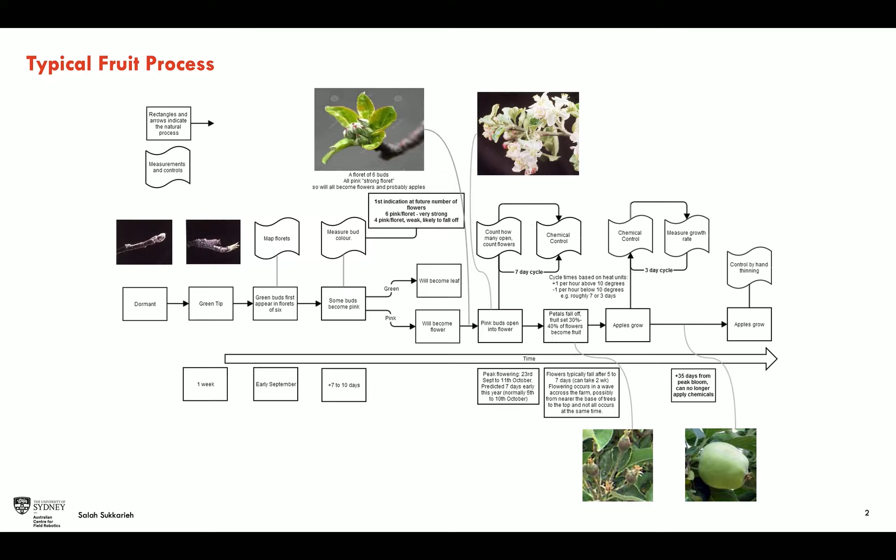When you look at Jasper Brown's video on YouTube, you'll see the end goal, but in this activity I wanted to lead through the process. That was important because to get to that point of harvesting, we needed to go through the steps with the growers and look at different aspects of their farm production cycle to understand where the perception system as well as the control system would work.

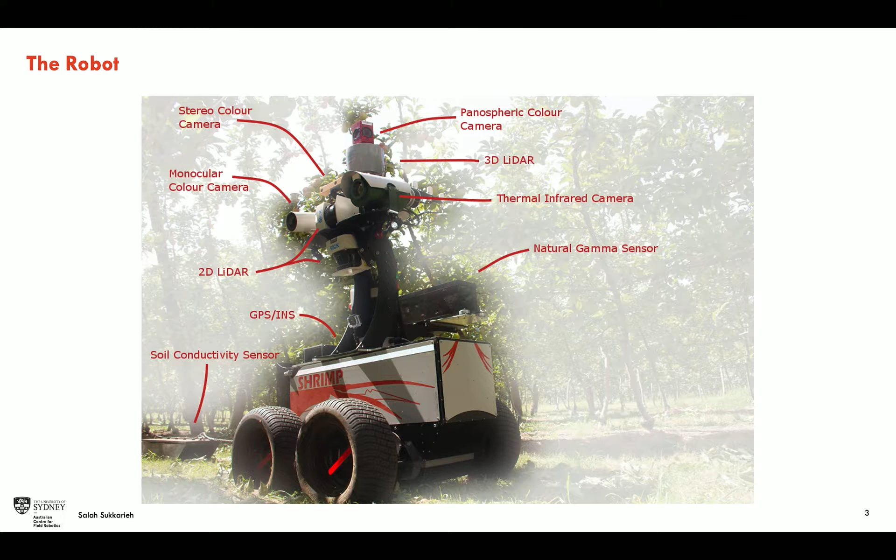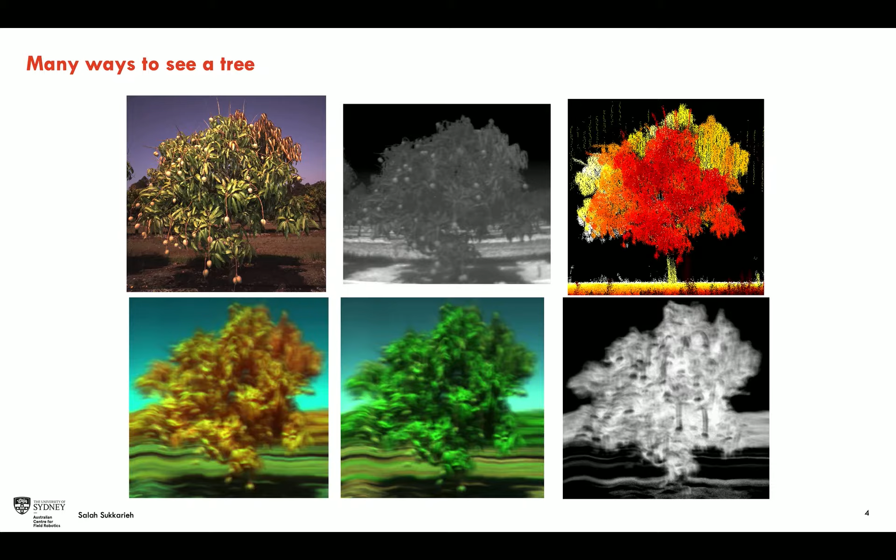Originally we had this robot - just a Shrimp unit where we put a whole bunch of different sensors on board. We started to look at different aspects of what you saw in a tree and the different types of sensing information that was relevant - was it hyperspectral, laser, LiDAR, vision, thermal, or a mixture in between. Those were the key elements we wanted to focus on.

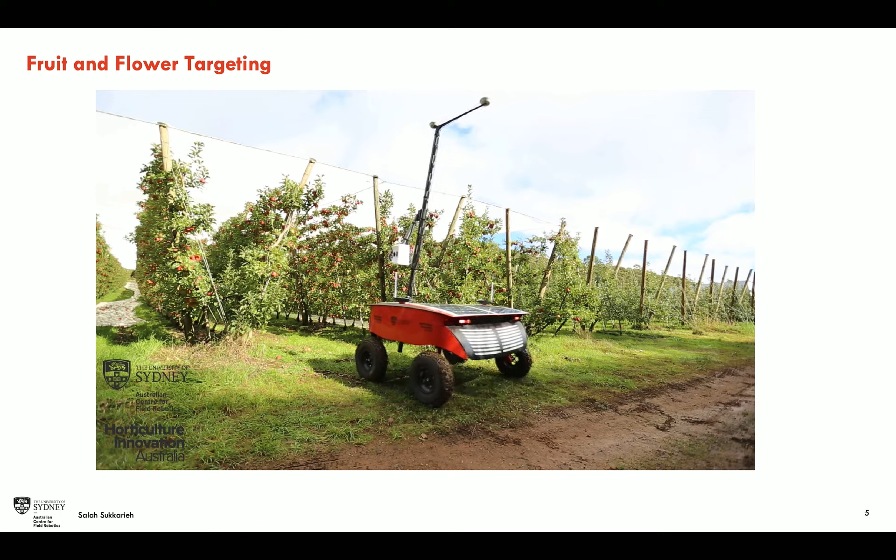This is a video showing the output of one of those activities, which was: in real time, could you detect fruit and target fruit, and at what frequency could you do that. This is detecting apples in real time, and you can see a little water squirter firing at each individual apple as it comes through.

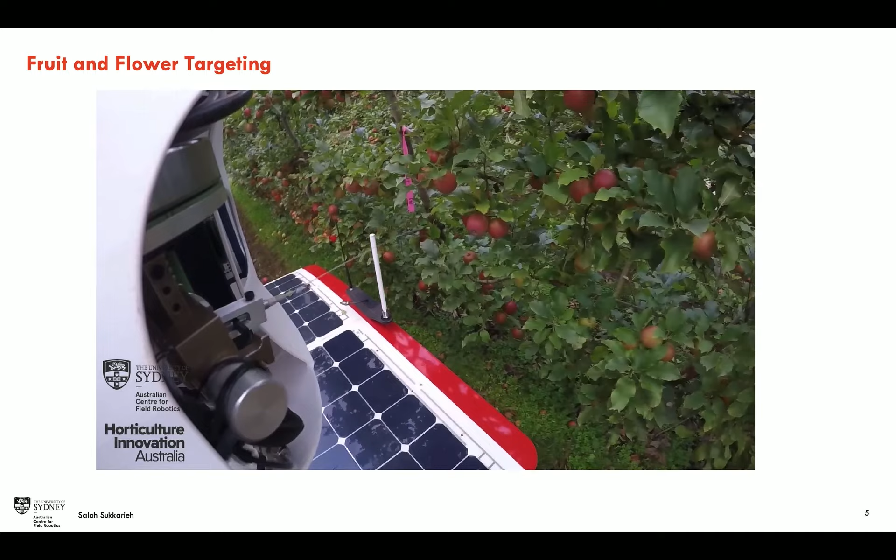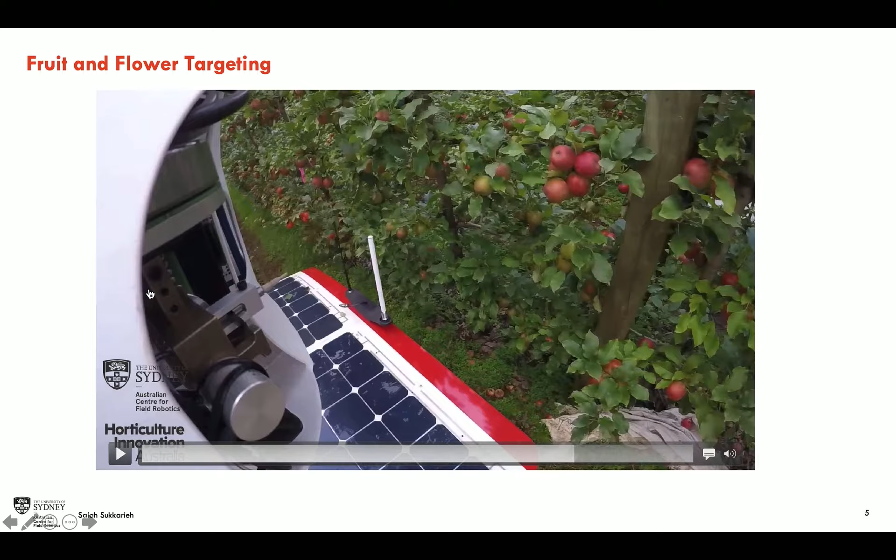That basically gave us a combination of a robot moving in real time, detecting fruit in real time, trying to count fruit even when there was occlusion, as you can see in this area, and then being able to target - so we wanted to get a relative coordinate frame running in real time as the robot was running through. That helped us get to the next level of harvesting, and that became the key element there.

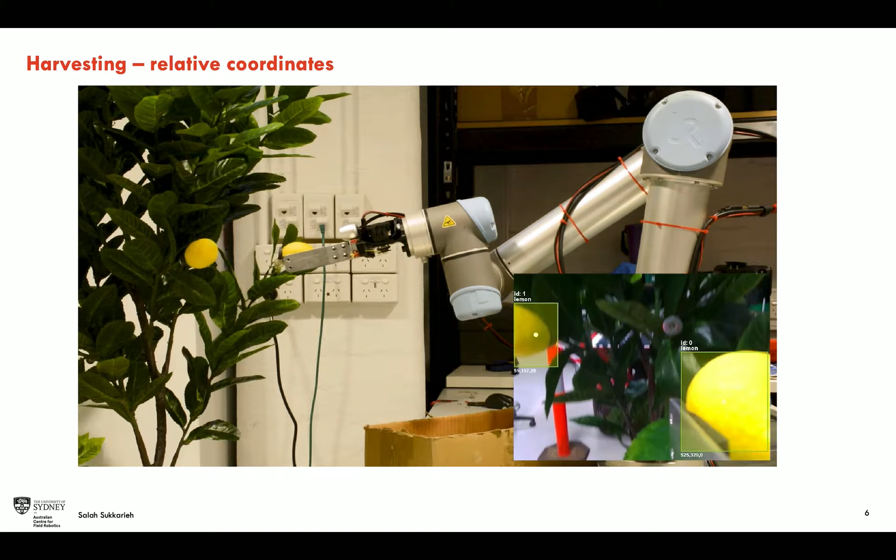So we looked at relative harvesting, being able to coordinate between eye and arm robotic technology. These are all plastics, not real fruit, but can you do real-time detection, and from real-time detection, real-time harvesting? These are some of the first lab experiments we went through.

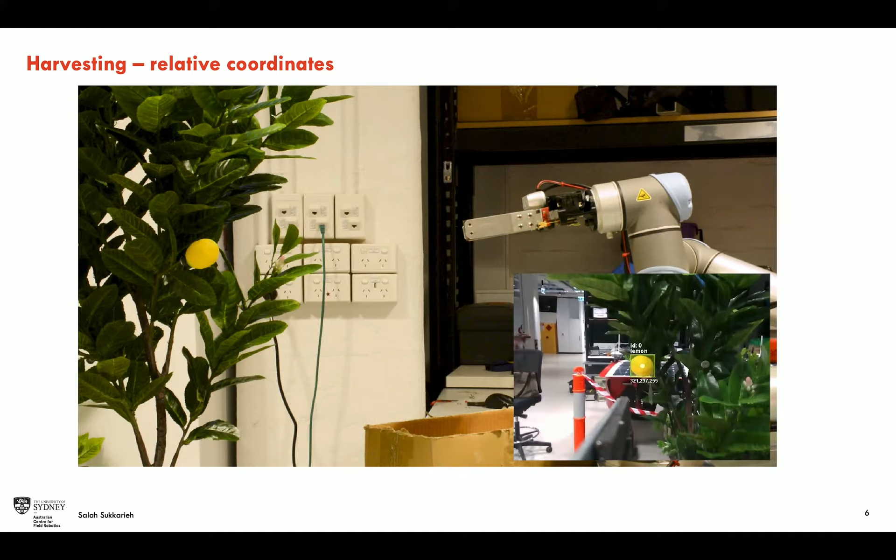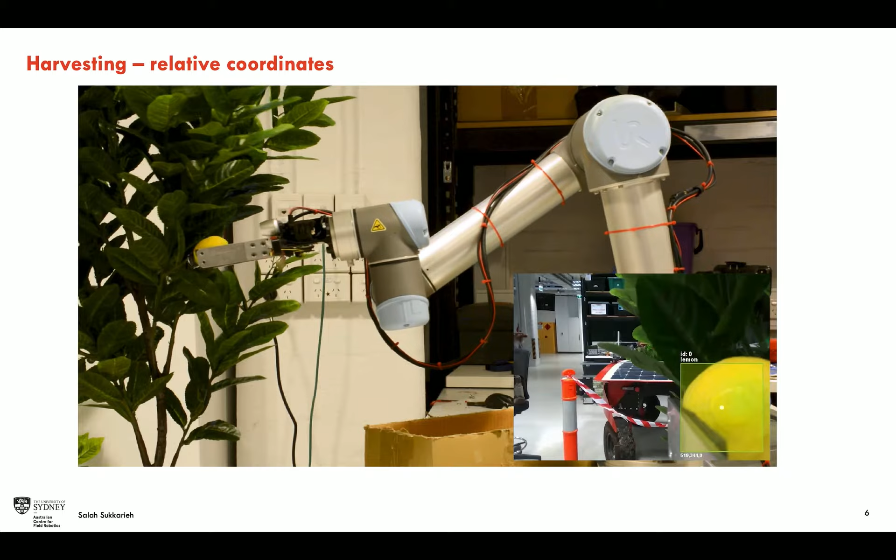What was key here was, obviously, trying to look at relative coordinates, being able to detect fruit, determine the bounding box around the fruit, position the robot, and then when you go to harvest, you have movement happening with the tree - so what do you need to do to adjust to that?

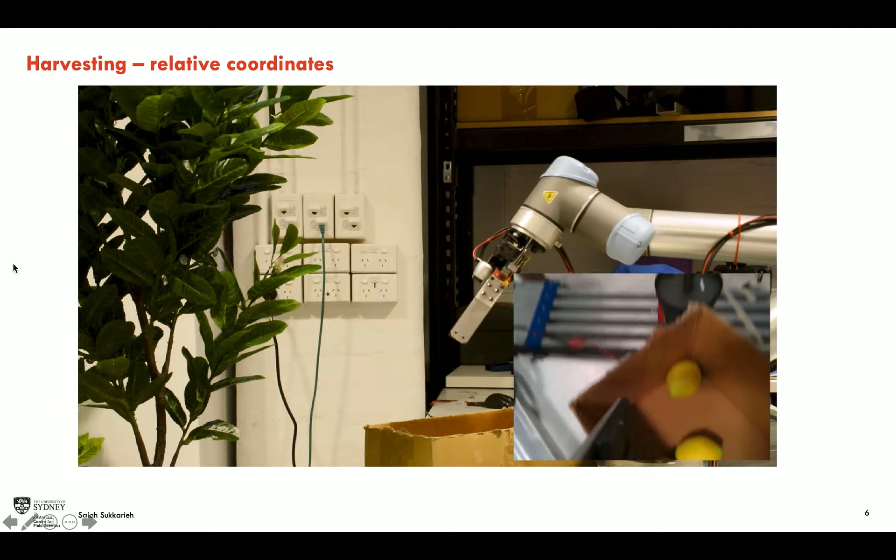Same thing with the lemons in this case, slightly quicker now, getting a bit better - being able to look at harvesting and where you place and move. It was really just trying to look at the different techniques applicable in harvesting. In this case again, trying to run in real time, determine the appropriate configuration of the robotic arm, what angle to come in at, what happens when you grab, how the motion moves, and the movement of the tree, and being able to harvest that.

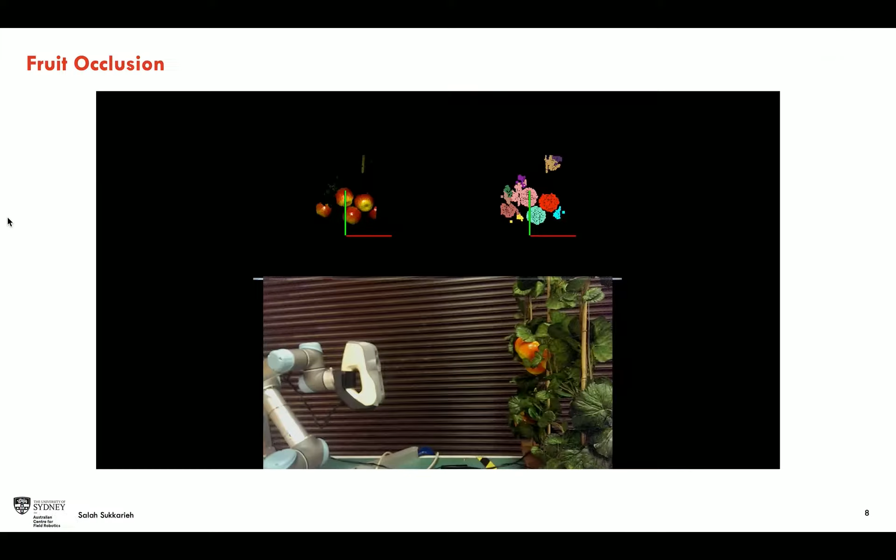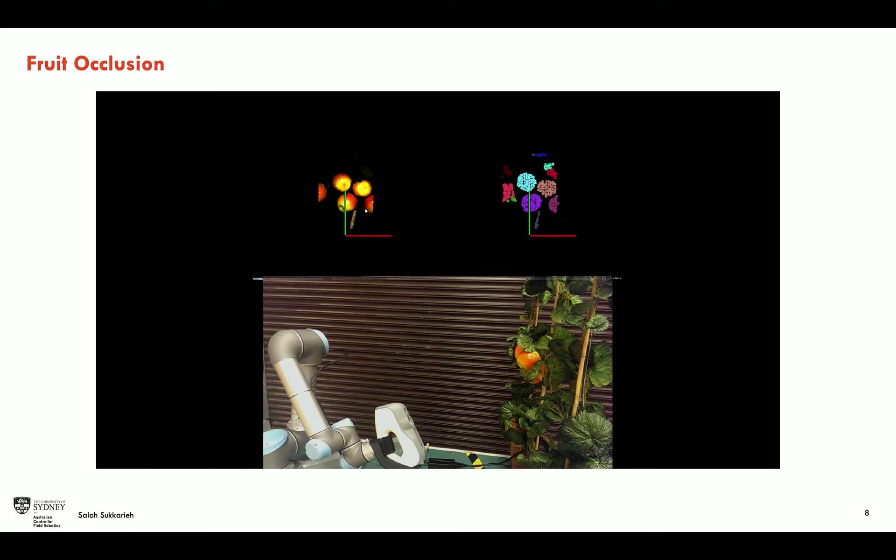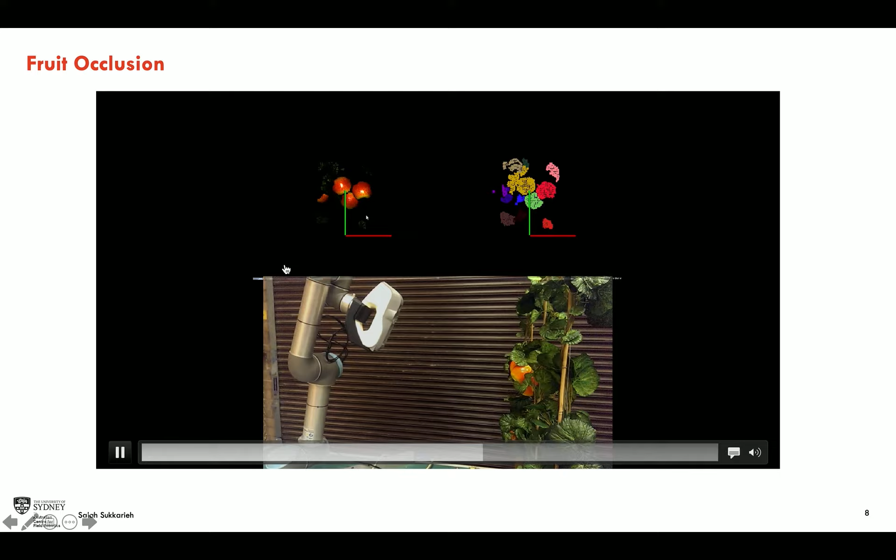So we use Gaussian mixture models to try and determine the shape of the objects that we're looking at, and then turning the Gaussian information uncertainty into an action, so as to minimize that uncertainty or to maximize the amount of information.

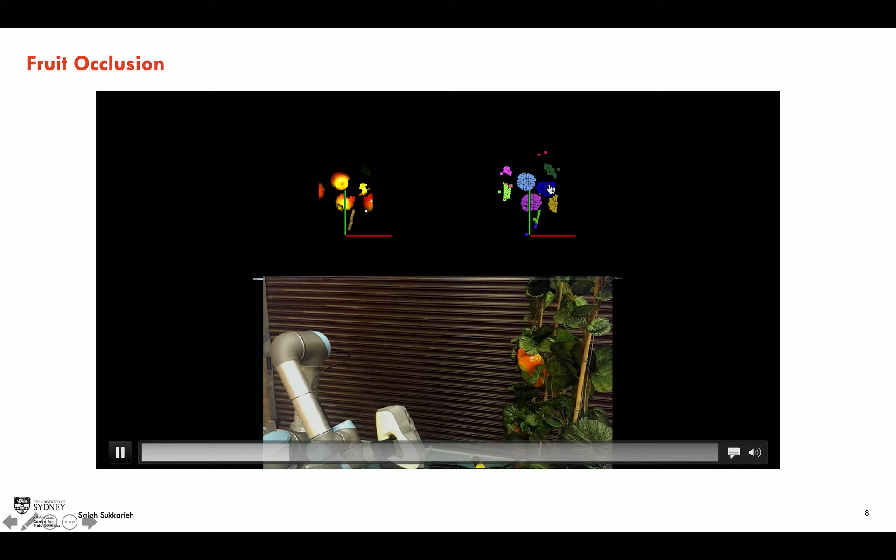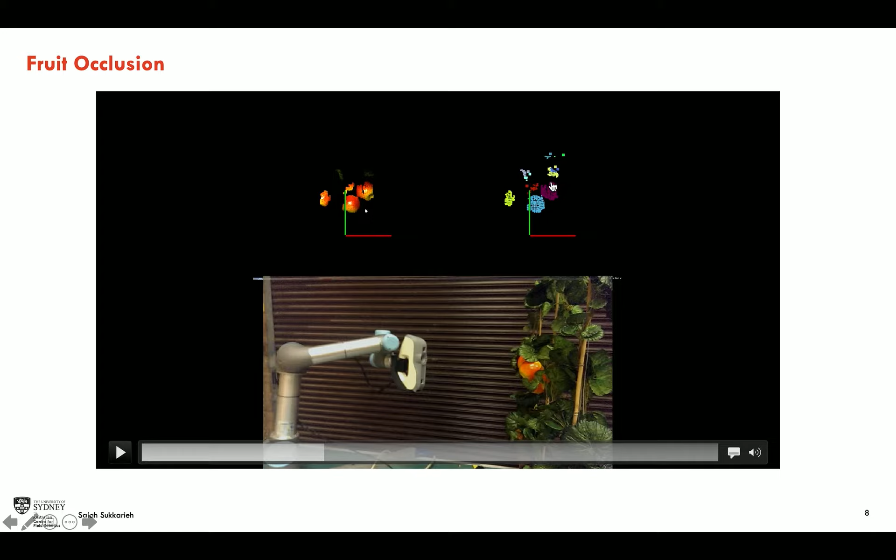So the robotic arm would be moving accordingly in real time to try and minimize the uncertainty that was caused by the occlusion, whether it was between the tree, between fruit on fruit, or whether it was between the foliage on fruit. So if we could come along and determine the shape of an object, determine the uncertainty around our understanding of the shape of the object, then what was the correct angle and positioning of the sensor frame in order to minimize that uncertainty.

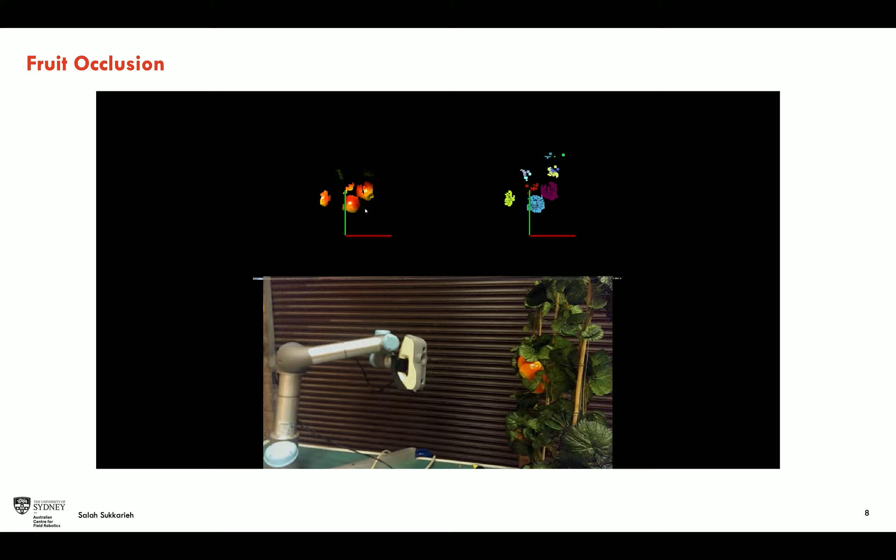And that helped us understand a bit more about occlusion. So then what ended up happening was this process of being able to go from relative coordinate frames, being able to detect fruit in real time, determine the location of the fruit in real time, and then deal with aspects around uncertainty and occlusion as well.

And then we looked at some soft gripper harvesting, and this was just trying to understand what was needed, what was required if you started to bring all these things together. So if you started to look at occlusion, if you started to look at occlusion as well as—let's jump a little bit ahead.

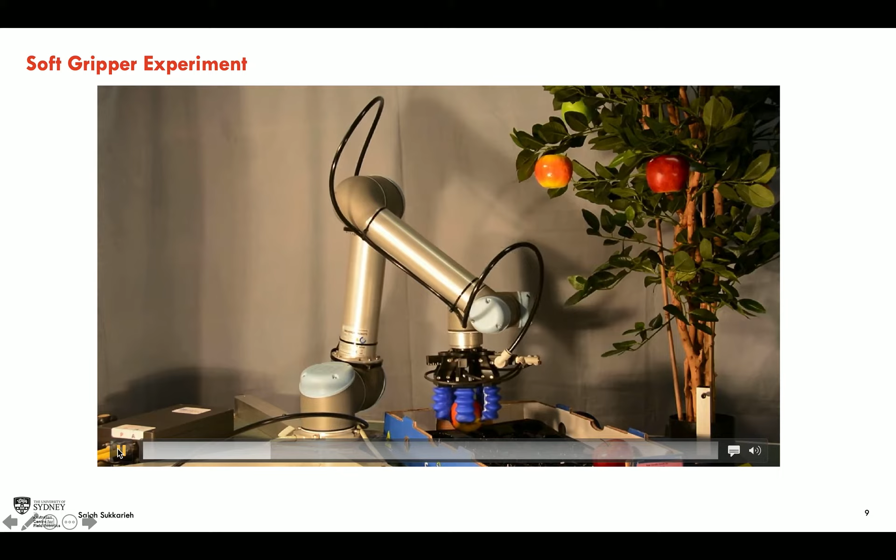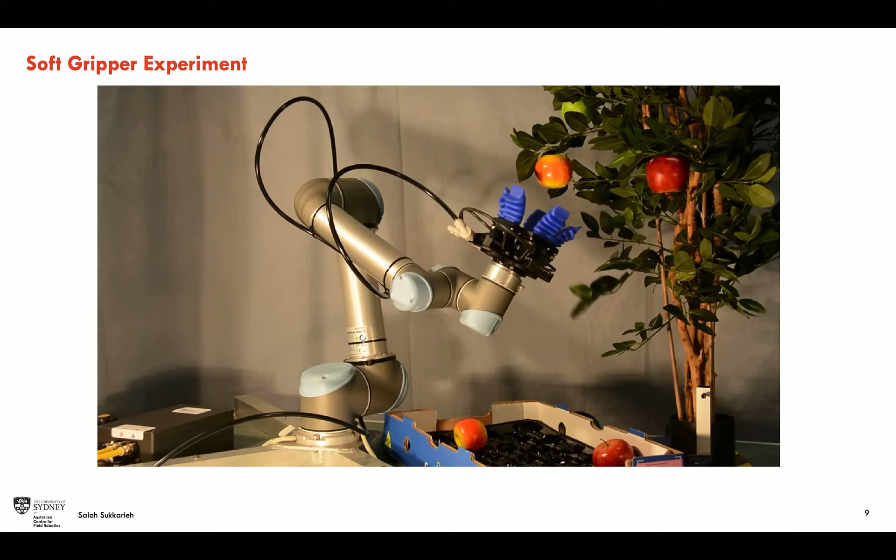If you started to look at occlusion as well as the positioning of the robotic arm, where it was, what would happen to the tree when you started to harvest, and then what was the right angle given the different types of gripper configurations that you would see, then it gave you a perspective of the overall activity from detection all the way through understanding occlusion, and then what was the right positioning of the gripper frame.

So in Jasper's work, which is my last slide, you'll see this all coming together. We basically just took a robotic arm out into the field. This was part of the process of trying to detect that initial work. Take the robot out in the field. This is Jasper here taking a photo of the system, and the robotic arm's on top.

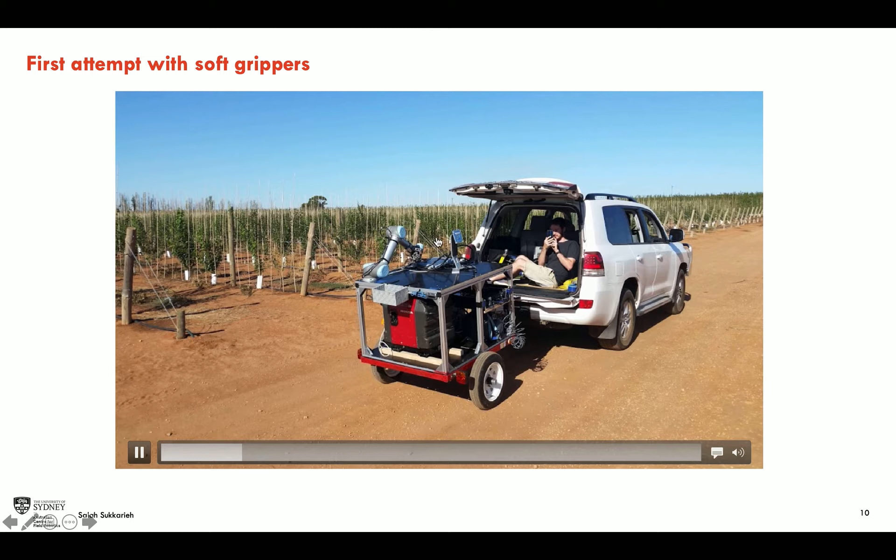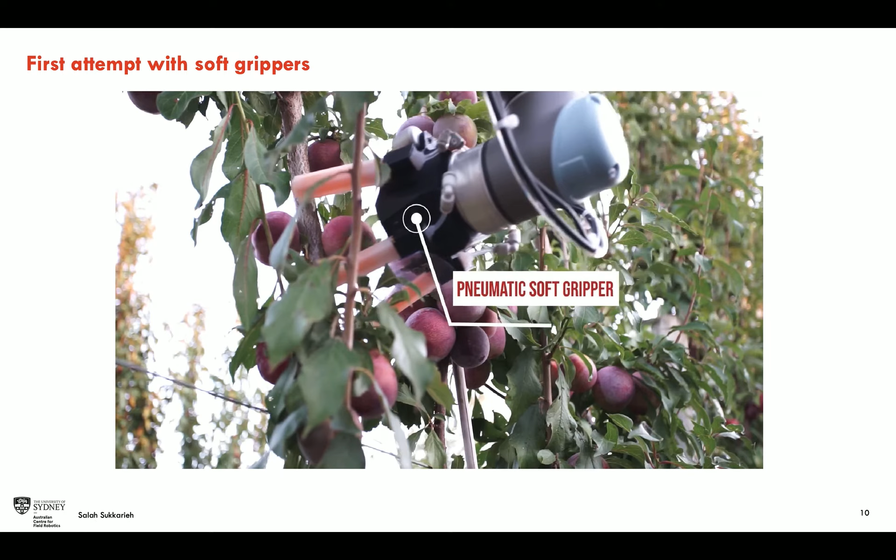And then we looked at different types of soft grippers. We actually started to build our own little soft grippers, just to see what would work. This was looking at summer fruit, and trying to position the robotic arm in real time outdoors, which, as you can imagine, is a difficult task in order to look at different aspects of harvesting.

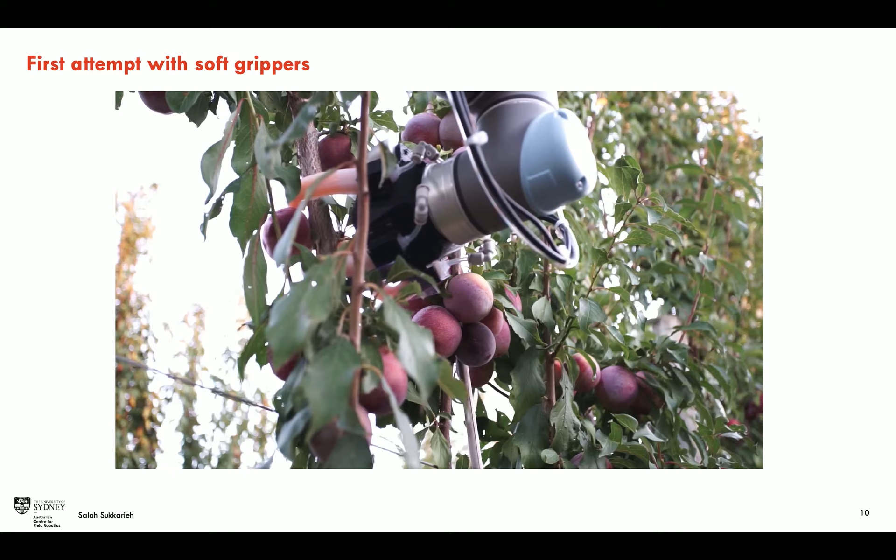Jasper talks a little bit about where it failed, what the issues were, especially around being able to grab the fruit in a way that you weren't going to damage the fruit on removing it, so that it wouldn't scratch up, because this is quite delicate fruit, as well as the type of grippers that we used.

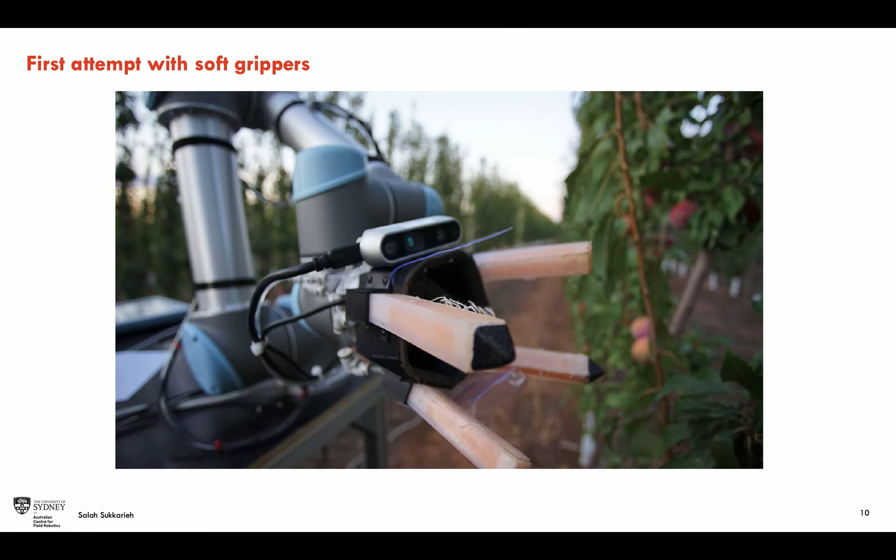And what happened to those grippers—what would happen in real time as you would try and grab the fruit and remove it from the tree. So this is just showing you all the different approaches coming together. And as I mentioned before, when you see Jasper's thesis, you'll see where it worked and where it didn't work, and what the issues were.

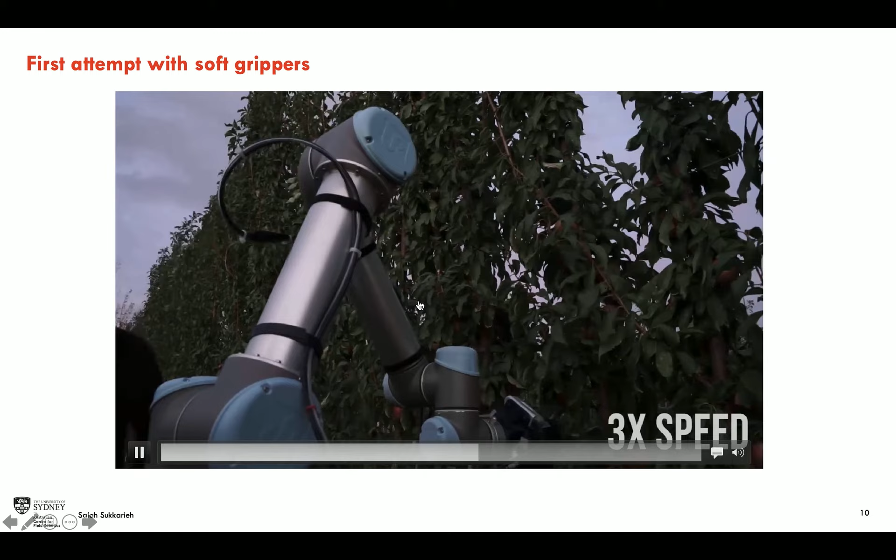So in Jasper's video, in this particular case, being able to detect the fruit, but the foliage got in the way, and so you weren't quite able to remove the fruit properly.

So that's it. Like I said, I recommend that you see Jasper's thesis, and that will help you understand a bit more about the activity that was there. I thank you for the time, and thank you for the opportunity.